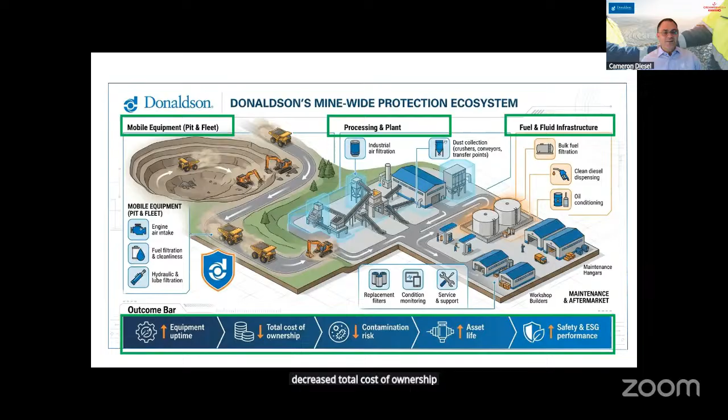That's our aim, that's the value we can provide to our partners and customers. If we look at the bottom bar, less contamination means more uptime, which means decreased total cost of ownership and increased asset life. And in health and safety, we're going to positively influence your safety and ESG performance. That's the impact we see when we partner correctly across a mine site.

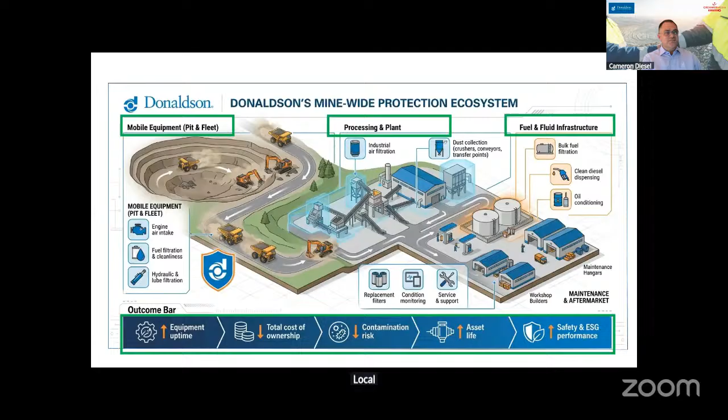Again, not product heavy. We're going to focus on applications, coordination, and outcomes. And we have one of our distribution partners who I'll introduce in a moment, because all of this is only possible through partnership on the mine site with local representation. So let's use that as the bridge into introducing our panel.

Atish is with our industrial air division, looking at plant reliability, compliance, and lifecycle costs. He is the sales manager for Donaldson Industrial Air Filtration business across Africa. Engineering background, once again technically strong, with extensive mining sector experience specializing in plant air systems.

And Ian du Toit, he's going to really focus on local execution and on-site delivery, and what some real-time mining outcomes look like, and what impacts he's seen in his daily business.

He is the national sales manager at Highveld Filters, one of our authorized Donaldson distributors. Across South and Southern Africa we have about 50 distributors, and across Africa about 100 distributors, all with different levels of experience and expertise. Highveld certainly is one of our technically strong distributors who operates in this mining filtration ecosystem space. Just a note on Ian, he has over 20 years experience across OEM and aftermarket filtration in mining and heavy industry. So with that, I'm going to hand over to Santiago.

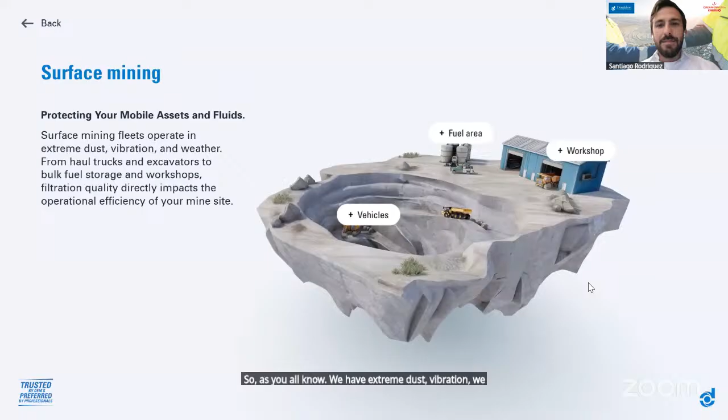Let's start with surface mining. As you all know, we have extreme dust, vibration, weather. Sometimes the dust in combination with rain becomes this sort of clay that is also very challenging. So from the beginning, what we need is the absolute best filtration on board. That means from the air filters to the lube filters to the cabin filters protecting your drivers, to the AdBlue.

Now, we do have that. Donaldson has had more than 100 years of experience being on the leading edge of filtration technology that we actually put on those machines. I'm not going to go into specifics, but again, we have absolutely the leading edge on the actual technology that we have in each one of the onboard filtration systems.

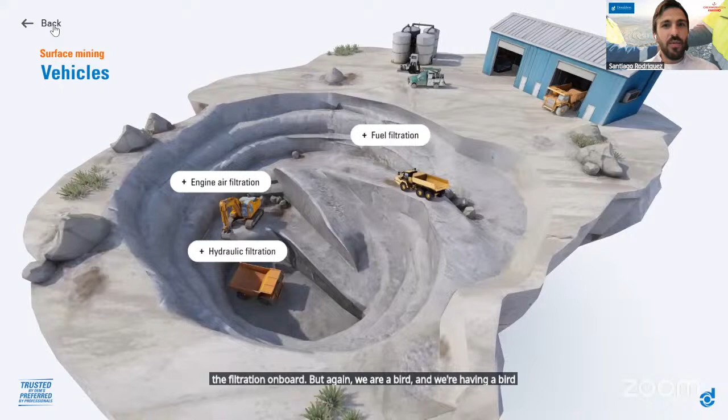One of the things I want to resound, that Cameron also said, is that a lot of our competitors only focus on what's happening on the machine, which is absolutely of vital importance. I don't want to reduce any of the importance of the filtration on board. But again, we have a bird's-eye view of what is the holistic way of having better efficiency in mining operations. And that does not stop at the machine level.

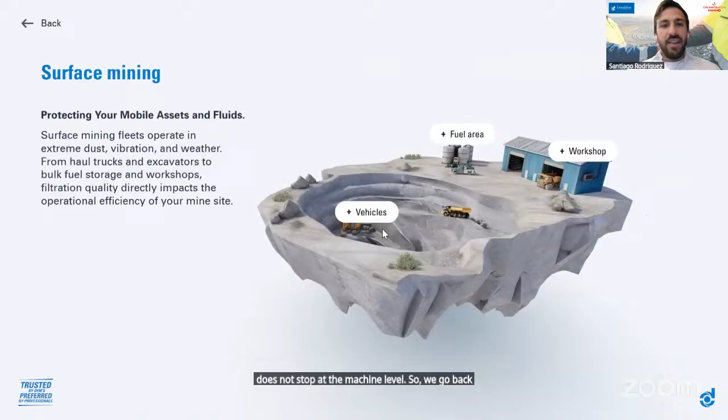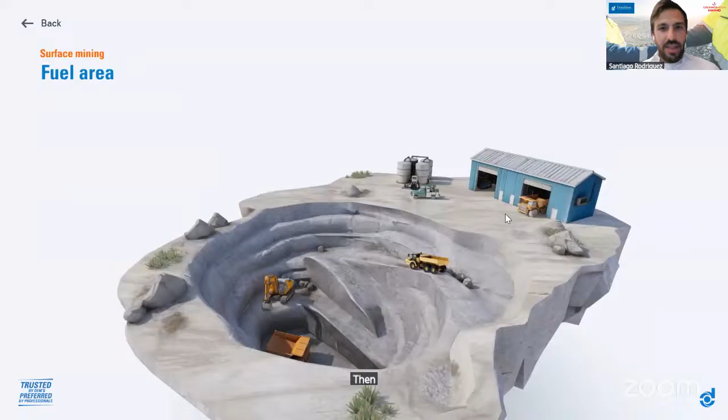So we go back and see where the diesel is coming from for these machines. And of course, it comes from a refinery, then gets delivered, then gets to the fuel area, then we get storage, either properly or not properly stored as well. Each one of these steps is an opportunity for that pesky dust to contaminate, in this case, either the fuel or the lube that we have.

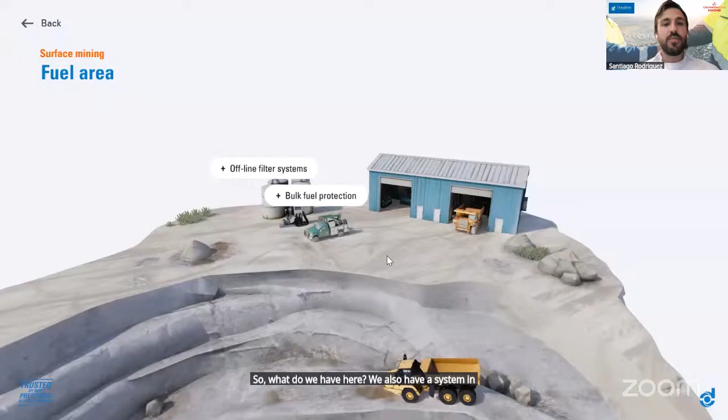So what do we have here? We also have a system in place which protects our fuel and lube, which is absolutely essential to keep the operation running smoothly.

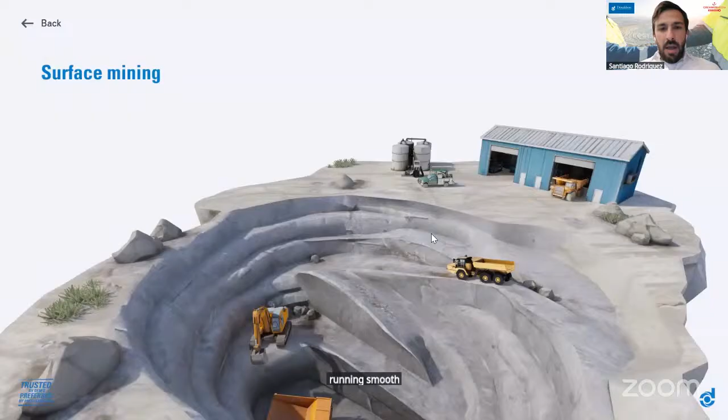In underground mining, we have a different flavor of the same problem, which is having a lot of dust within a more confined space. We also have strict requirements, not only for the machines, but also for the people inside. We never have a boring day because we always have different challenges no matter where we go.

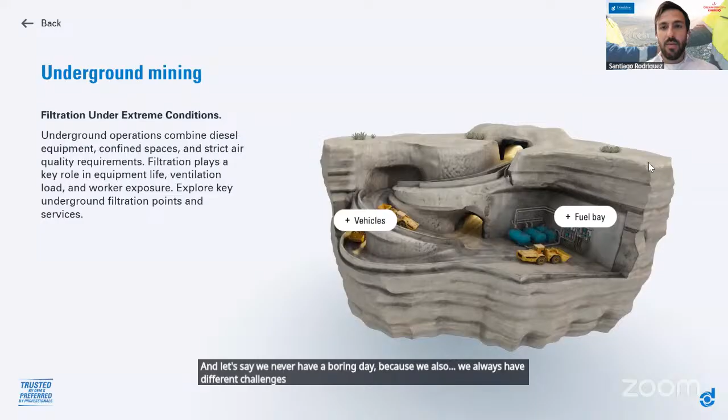Now I want to jump into the importance of having filtration in a holistic way — that means in the machine, and in the process that we have. I want to walk you through a little business case that we did at a mine. In this case, it's in Europe, a gold mine.

And the business case I'm presenting to you today has nothing to do with the onboard filters. I think you've heard a lot about Donaldson, that we have the absolute best quality and we're protecting all the filters within the machine. But what do we do before the fuel gets into the machine and the lube gets into the machine? We make sure that the fluids getting into the machine are in pristine quality, and we really allow those filters within the machine to perform at an optimal level.

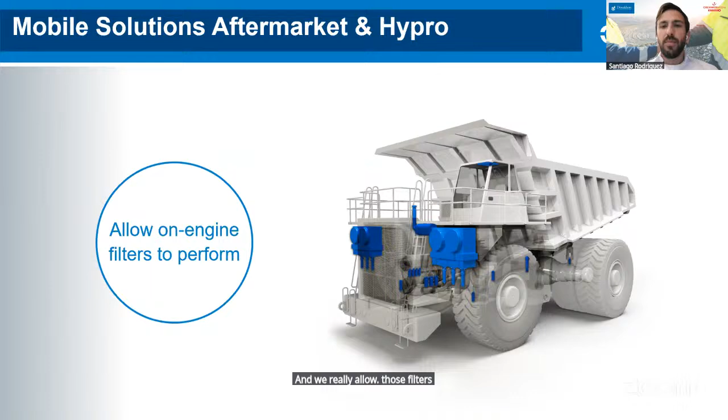So the mine we're talking about — and I'm sure if you're in the mining industry, you understand the sort of loads and performance we need from a mine — in this case, it's a mine operating 23 hours a day, 7 days a week, and any unplanned downtime of a machine can cost hundreds and thousands of euros.

So what did we do here? First, we came up with an analysis of what they had — they had a few diesel and oil tanks. What we did is go in there with our clean solutions approach. That means we clean the fuel as it's coming from the delivery, protect it once it's in the tanks, and then do a final filtration polish before it goes to the machine. All great, all good.

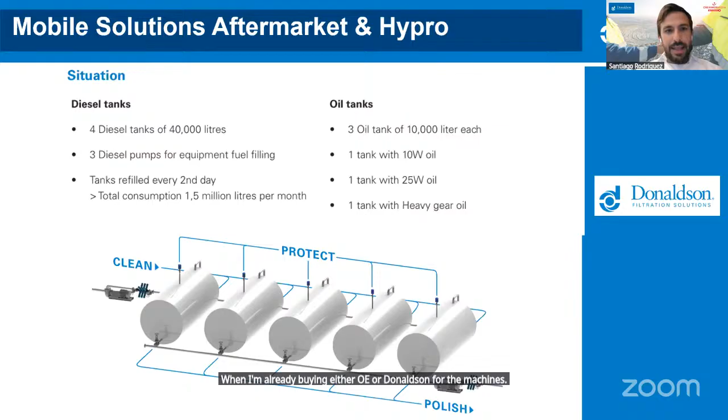The unplanned downtime, this is where the money is at. You very well know that when we have a stop of one of these huge machines in the mine, this can mean up to $150,000 per hour.

What happened? We changed from the 24 hours that we had, we reduced it in half to 12 hours. And the other thing that we were allowed to do is, since we had much more pristine fluids coming to the machine, what does that mean with your filters? The actual spend that you have on filters will be slightly lower, and you can increase the service interval.

We have indicators, we have fuel and lube monitoring to understand how dirty that actually is. And if we can extend that service interval for the onboard filters, we will do so as well. So that means we actually sell less filter onboard, but you have a smoother operation.

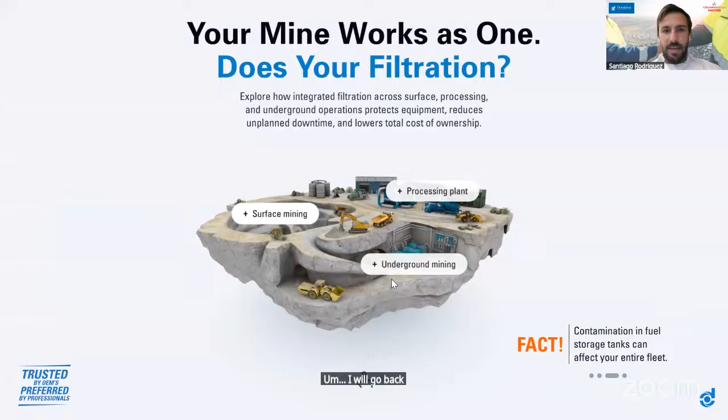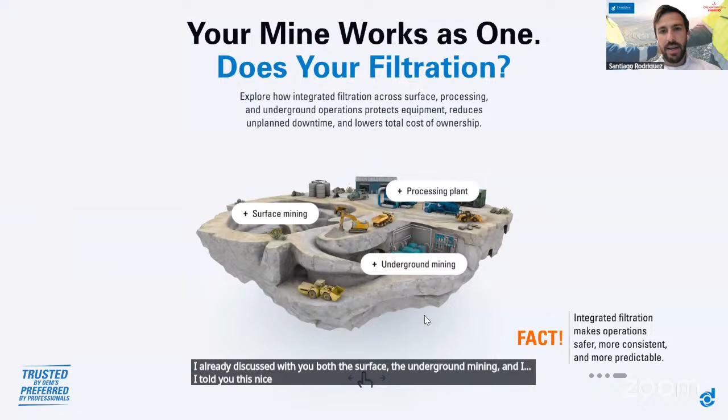I will go back to the ecosystem. In this case, I already discussed with you both the surface and the underground mining, and I told you this nice example of the gold mine. So I want to go now quickly to the industrial side of things.

And for this, I have my wonderful colleague Atish explaining you a little bit more of what's behind it, and what do we do and what do we offer also from the industrial level.

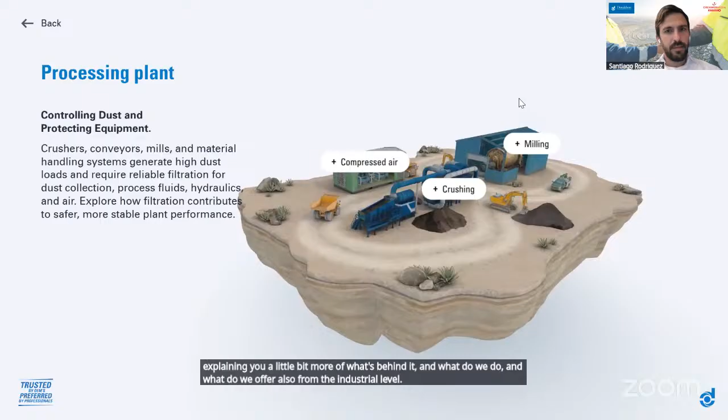Morning, everyone. So building on what we've seen from Santiago with regards to the mobile solution and Hypro product lines, I'm going to expand further down the typical mining flow sheet into the processing plant, and presenting the industrial air filtration offering, known by the acronym IAF, and how it complements the portfolio and the types of uses it's designed for.

Typically, Industrial Solutions' diverse product range will cover applications ranging from the ROM stockpile all the way to the final product, inclusive of the conveyors, transfer points, crushers, mills, silos, pulverizers, the smelting plants, even considering the MCC rooms requiring pressurization and extending into the processing labs, both fire assays and sample preps.

Essentially, IAF utilizes a team of multidisciplinary specialists in conjunction with our customers. We go through to the relevant site and conduct an extensive evaluation and gather the relevant information, after which we present proposals to the customer as well as the relevant stakeholders.

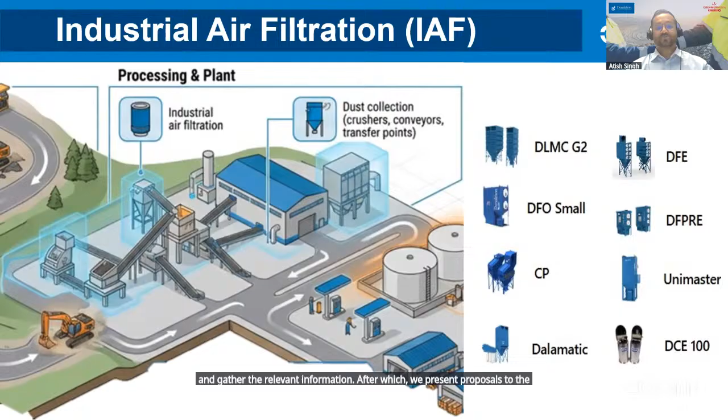In summary, I want to present a case study encompassing typical solutions in the mining industries across Africa. This particular case study pertains to a typical fire assay lab section of a mine. As mentioned prior to this, together with the client, we firstly gather information on extraction points, material specifications, and based on this, the team evaluate the application.

We then select the applicable solution, design the ducting layout by factoring extraction velocities, air temperatures, the transfer velocities within the ducting, as well as the settlements and face velocities, ultimately ensuring clean air and finally transmitting into the atmosphere and enhancing longevity of the system.

This particular case study is based on a gold mine in East Africa, where the client required an effective fume and particulate extraction solution for their fire assay lab. The lab contained both fusion and cupellation furnaces, and they generated hot gases, fine particulate, and metal-bearing fumes, which created a health and safety risk, air quality risks within the lab itself.

The challenge was to ensure reliable capture and filtration of the high temperature emissions while maintaining clean laboratory conditions within the lab. We found that the dust nature was very fine abrasive mineral dust that was potentially toxic, and through the furnaces, high temperature as well.

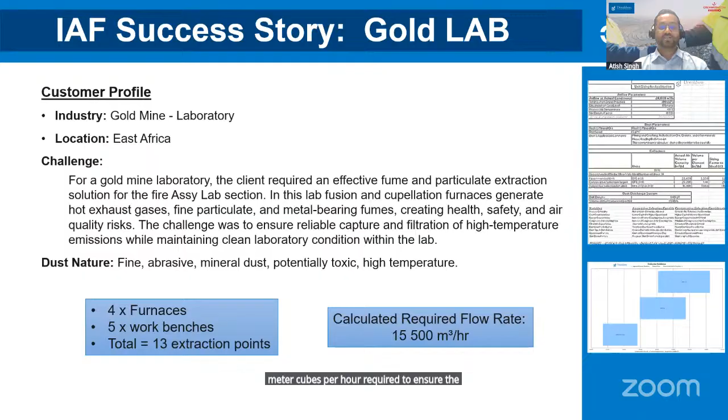The offering to the client was a complete turnkey solution, consisting of a DFE4-16, which is our proprietary downflow evolution trigonal filter cartridge units. The cartridges that you utilized were high temperature Thermoweb cartridges, which were able to handle the maximum 135 degrees Celsius air temperatures. Together with this, we selected a suitable fan set for the correct operation of the system, together with the design and supply of a balanced hood and ducting system.

This is just one of the many listed applications in which Donaldson's IAF range provides advanced industrial air filtration solutions.

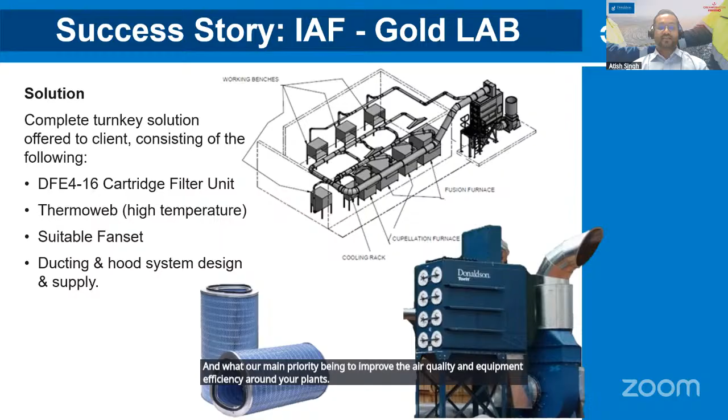We specialize in dust, fume, and mist collection, with our main priority being to improve air quality and equipment efficiency around your plant. That's just a quick wrap up and overview of our industrial air filtration division.

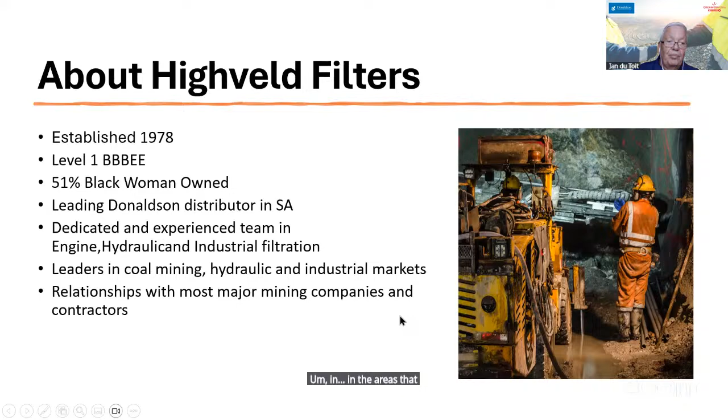The market sectors we operate in are mining, both open cast and underground, as well as the construction markets, which basically go together—a lot of construction equipment is used in the mining industry as well. We also operate in the agricultural market, as well as petrochemical, paper and pulp, and industrial markets.

Our footprint is quite well established, mostly in the Mpumalanga coal regions, with our head office in Emalahleni, or Witbank as some still know it. We have branches in Middelburg, Secunda, Ermelo, and Delmas. Those branches are predominant in the coal fields, and we have a lot of technical expertise in that area.

We also manage operations in Richards Bay and Durban, with 2 branches in the KwaZulu-Natal area. Both the Mpumalanga and KZN areas also have a lot of agricultural business. We also manage a number of vendor management inventory sites, where we have store facilities and inventory that we own but manage for customers, to facilitate their maintenance requirements and add value to their operations.

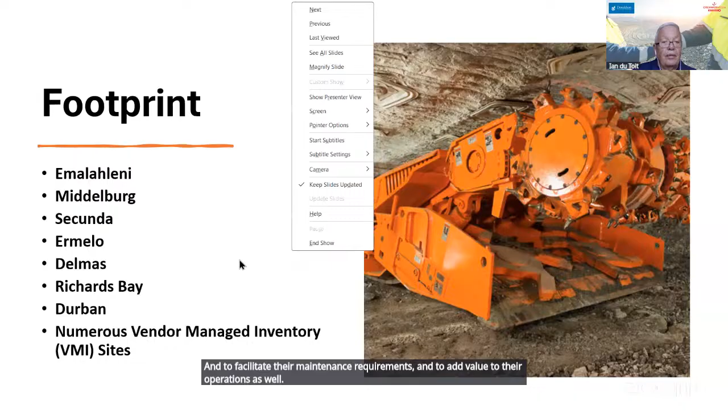So our current capabilities are as follows—I'll explain, but we do not limit ourselves to this, and we will customize any offering based on customer requirements.

We develop kits for both open cast and underground mining, which can be customized or based on OE specifications. This is also based on a customer's maintenance philosophy, as each customer has their own service philosophy that doesn't always fit in with the OE approach. Some change the philosophy, either servicing at shorter periods or extending operations wherever they can, using the total cost of ownership, as Cameron explained.

Total cost of ownership has become an important part on primary equipment, and that is based on the service philosophy and the utilization of hybrid kits—meaning we will fit in Donaldson products, and in some instances OEM products, based on what the customer requires.

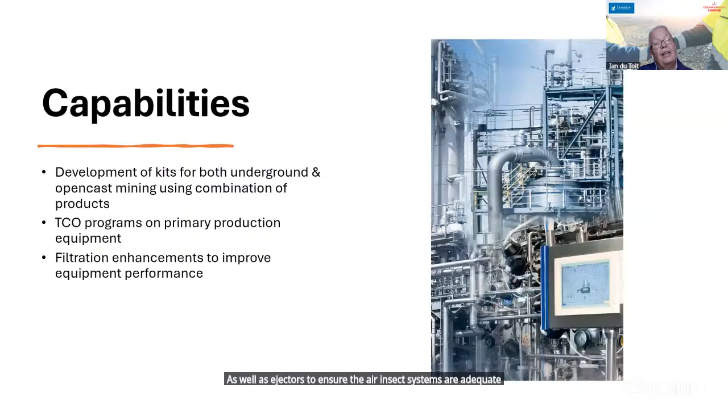We also do filtration enhancements on equipment, again to extend equipment life. This basically entails changing or improving the OEM filtration. A good example is fitting extra pre-cleaners onto equipment as well as ejectors, to ensure the air intake systems are adequate, remembering that South African and African conditions have dust loading about 7 times higher than that of some European and Asian operations.

As part of a contamination control program, we also install additional hydraulic filtration on mining equipment to ensure fluids are kept at acceptable cleanliness levels. We also run contamination control programs where we take responsibility for the customer's contamination fluids.

So we do the sampling for the customer, and we make sure that those cleanliness levels on that equipment are maintained. And in some instances, we even improve or maintain that as well.

We also do retrofits on primary, secondary, and secondary open cast and underground mining equipment. A lot of the time we replace the OEM filtration for improved filtration as well.

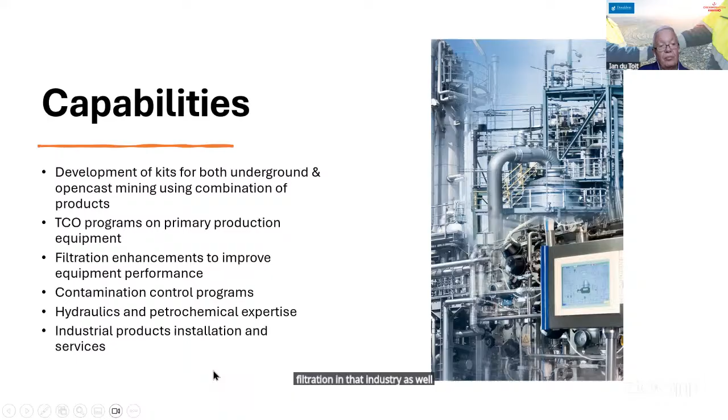We also do specialized filtration in the petrochemical industry. As you know, Mpumalanga has some, as well as the KZN region, we do specialized filtration in that industry as well.

And then we also do installation and servicing of industrial products to a varied customer base in both those regions. So before I present the case study, I just want to touch on how the supply chain has evolved during the past number of years and what has happened in the supply chain.

Firstly, consumers have become increasingly more aware of their options in the marketplace. While they have installed sophisticated ERP systems, it's become increasingly more important for them to reduce the number of vendors they deal with, thereby reducing their risk and improving efficiency.

If you remember, some customers have had so many suppliers, and a lot of people have based their approach on a Toyota system where they reduce the number of suppliers and improve their delivery as well.

So what do they do as well? They also choose suppliers based on performance, sustainability, and strategic fit. So before you do bids now for customers, they evaluate you 100% and check everything - your performance, your sustainability, the strategic fit, and how you build those long-term relationships.

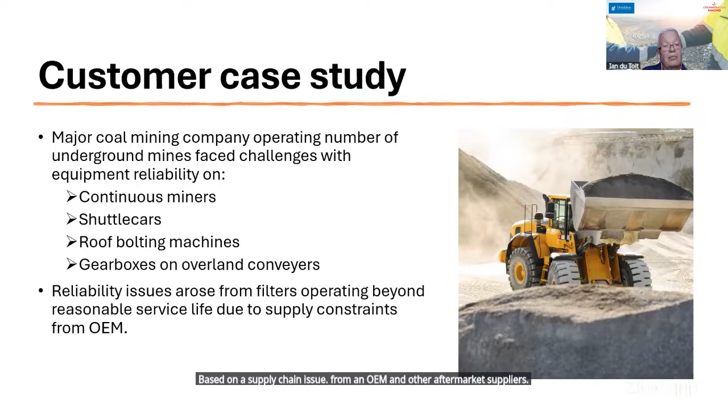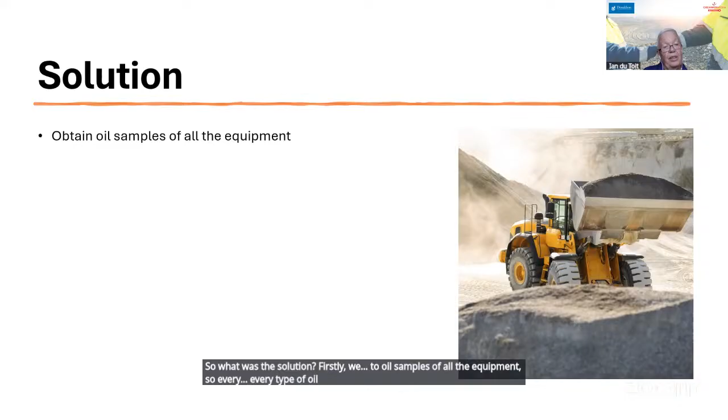So what was the solution? Firstly, we took oil samples of all the equipment - every type of oil used on that equipment, we took samples. Secondly, we analyzed the cleanliness of those samples so that we could get a base level of where they were sitting at the time.

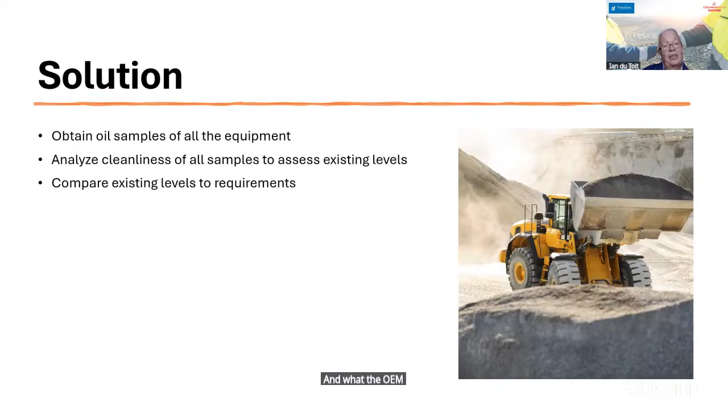From there, we compared that existing level to what their requirements are and what the OEM requirements are for that as well. So in this instance, we installed new filtration on a trial basis using both Donaldson as well as Hy-Pro high efficiency filters on that trial.

And then we repeated that process afterward and reassessed the new cleanliness levels for that system. So from there, the cleanliness levels improved from a level of 26, 23, 19 to a level of 17, 14, 11. So that's an 8 times improvement, or if you convert it, it's 256 times less particles in that hydraulic fluid.

So a massive improvement for the customer, improving the reliability of that equipment by a tremendous amount, and also saving them a lot of downtime, because the machines could be in service for a longer period of time. From there, we developed service kits, including that Donaldson and Hy-Pro service kits or filters in that program.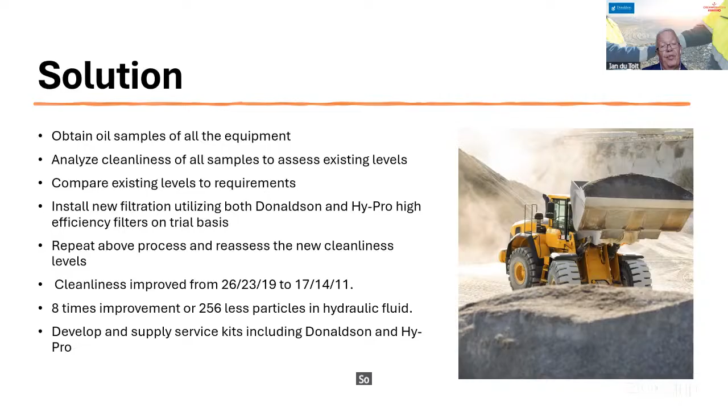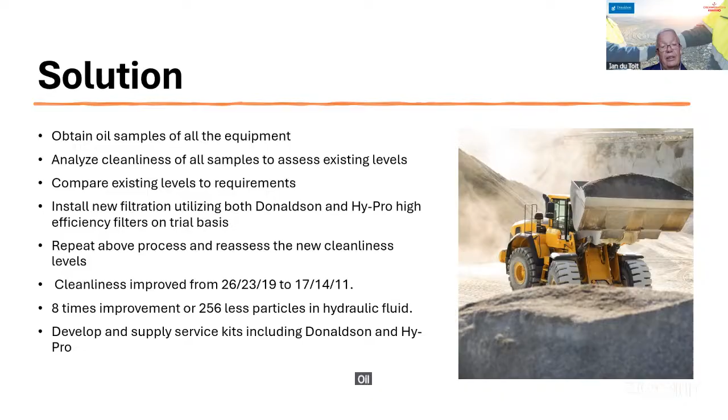So from there, the changes are continuous. The filters, or the equipment, is always at the optimum level. Oil level, or oil cleanliness level, is always good.

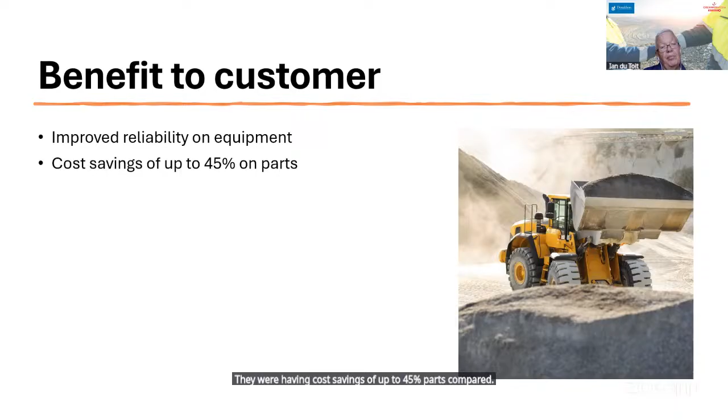So what was the benefit to the customer at the end of the day? That benefit is the improved reliability on equipment, so they can keep them in production for a lot longer. They were having cost savings of up to 45% on parts compared to the OEM and other aftermarket suppliers.

And the service kits are now provided, so they don't have to have loose filters. The kits are provided to do specific services, and it is their cost of maintenance as well.

So for them, there's a benefit on the supply chain - products are available from a single source. They don't have to go to various suppliers to obtain their filters, and we could supply from that single source as well. For us and the customer, it creates a strategic partnership for both parties, and a long-term relationship as well.

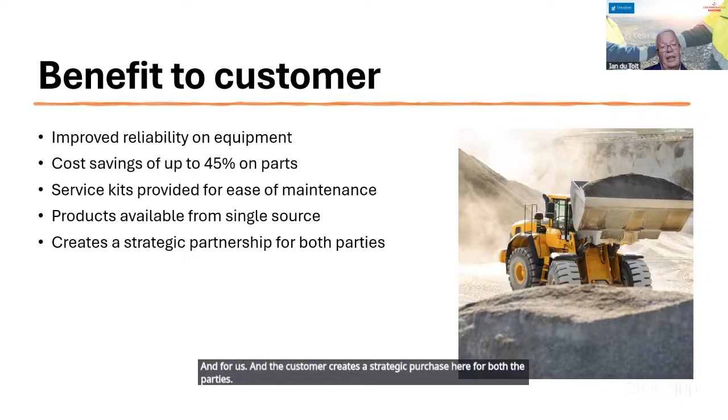Well, what is the benefit for Highveld Filters?

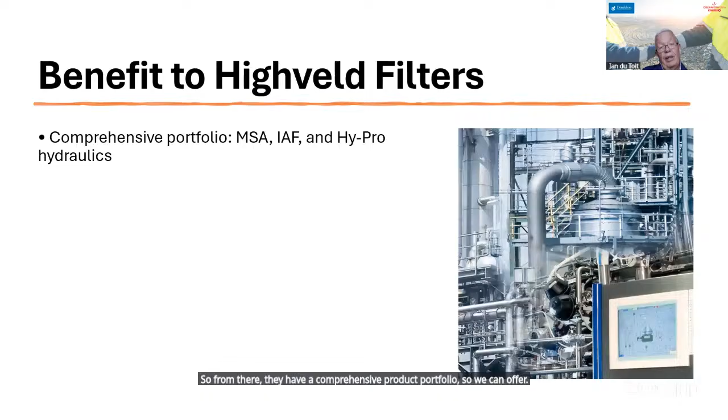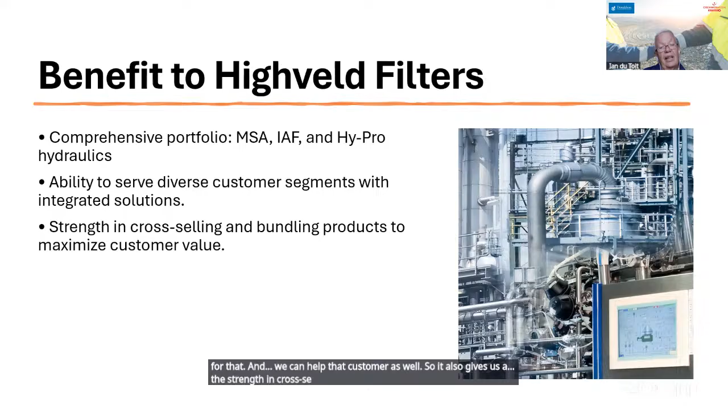From there, we have a comprehensive product portfolio, so we can offer the aftermarket or MSA product, the industrial air product, and Hy-Pro hydraulics in one. We've also got the ability to serve diverse customer segments with integrated solutions. In some instances, we can use MSA, IAF, and Hy-Pro together to assist the customer, making it easier for them to purchase from one supplier, and we can give them a solution base. As Cameron and Santiago said earlier, Donaldson is one of the few companies that can provide solutions like that, and it gives us strength in cross-selling and bundling products to maximize the customer's value.

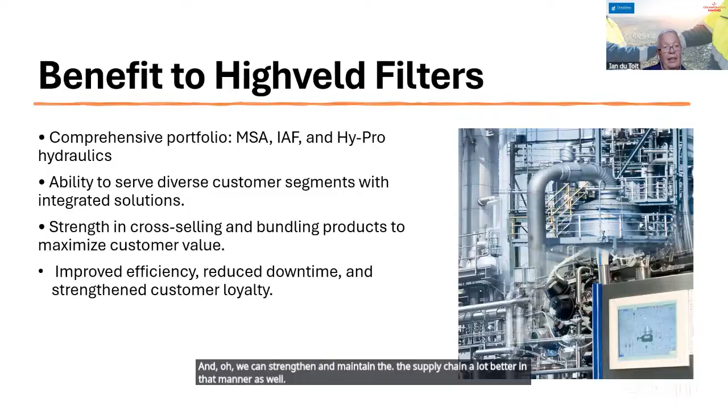From there, the customers get improved efficiency, reduced downtime, and we build a lot of loyalty from that customer. We can strengthen and maintain the supply chain a lot better in that manner as well. Thank you very much, and that concludes my presentation.